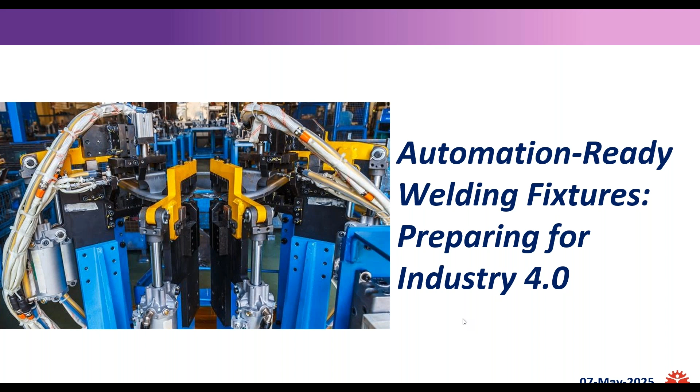Today, I've been given the opportunity to provide an introduction about APA Engineering and also about our expert Mohan, who is eagerly waiting to present his webinar on automation-ready welding fixtures. In brief about APA Engineering, it was started by two brothers with a couple of employees, has come a long way and been in business for 25 successful years now.

As we celebrated our silver jubilee this year, APA has become a 500 employee strong organization. We have been providing 4 different service lines, namely sourcing, engineering, compliance, and cataloging, and each service line complements each other through our certifications like ISO 9001 for quality and ISO 27001 for data security. Beyond that, we also got the TISAX certification to work with the top automotive companies from Germany, which is again a stringent data security certification.

We're also very proud to let you know that APA has also been declared as one of the happiest places to work by House of Cheer. Now, I'll just talk about the engineering division alone because that's where our presentation is going to be taking place. Our engineering division is classified into 5 different categories, namely product engineering, manufacturing engineering, plant engineering, digital modeling, and embedded engineering. So I'll go one by one through what we do in these 5 divisions.

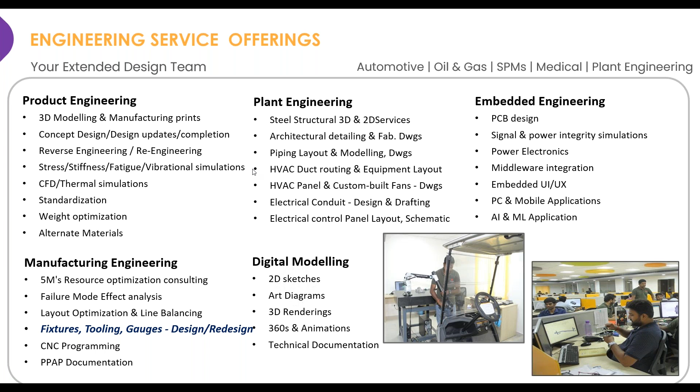And the next one is digital modeling. With rendering and 360s, we provide the perfect solutions to our clients who look for digital part catalogs and sell online. Last but not the least, in embedded engineering, we have good knowledge in PCB design, signal and power integrity simulations, and power electronics. So, to sum it all up, we work as an extended engineering support team for our clients in USA, Canada, Germany, and Australia. We add value to our clients through our consistent dedicated services. So this is a short description about our company APA and the engineering division.

Now I need to speak about our speaker, the hero of the day, Mohan, who completed his mechanical engineering graduation in the year 2006. He has 18 plus years of experience in various mechanical design projects and is an expert in providing industrial automation and fixture design solutions to our clients. To add feathers to his cap, he got certifications as well: Certified SolidWorks Professional and Project Management Professional. At present, he is heading the Automation Design Division as Project Manager.

There are so many projects he has worked on, but we have just named a few, like the assembly line workstation designs, end of arm tool design, and layout optimization design. So with this, I leave it to Mohan, who is going to present the webinar.

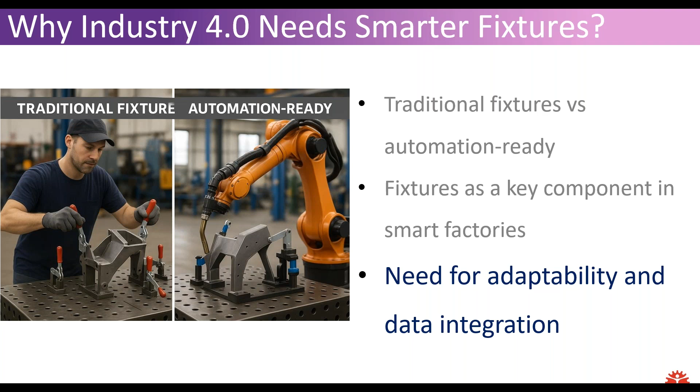In smart factories, everything is connected: machines, robots, and systems all work together. Fixtures are a big part of this. A smart fixture does not just hold the part, it also sends useful information, helps things be more accurate, and saves time. These days, factories make different parts and things change quickly. That is why fixtures need to be flexible. And when fixtures can share data, we can track how things are working and make better decisions to improve the process.

So now let us look into some of the core features of automation ready fixtures. One of the most important features is high repeatability. That means the fixture holds the part in the same exact position every time. This helps in getting consistent welds and better quality. And locating accuracy makes sure the part is placed in the right spot, which is very important for robots and automation.

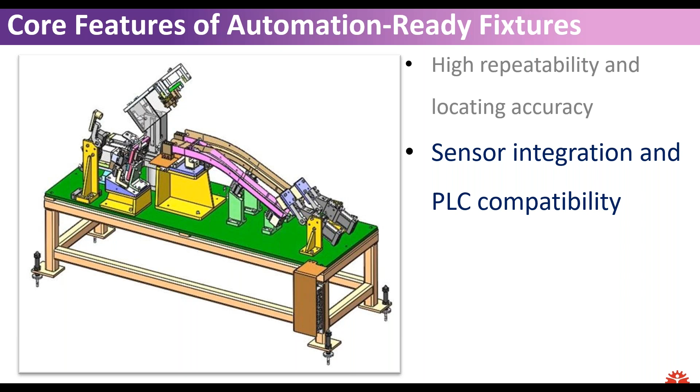Automation ready fixtures have sensors to check if a part is placed correctly or if a clamp is working properly. These sensors can send signals to the PLC or the main controller, so the system knows everything is ready before welding starts. And these fixtures come with quick clamping systems that save time and reduce manual efforts. Some even have auto alignment, so the fixture adjusts itself slightly to make sure the part is in the right position.

If you note this welding fixture case study, this can accommodate both left hand and right hand components of the front radius arm. You can find the component here, front radius arm here. But based on the client's requirement, only one product, either LH or RH, will be welded at a time in this fixture. So, to minimize the number of components in the assembly, a quick changeover mechanism is incorporated in this section. By pulling the knob and rotating the unit 180 degrees, this fixture can be quickly reconfigured to hold the RH component. So this is one of the examples of the quick changeover mechanism.

Let us see some of the design considerations for automation. The first important consideration is accessibility for robots. When designing for automation, we have to make sure robots can easily reach the welding areas. If the fixture is too tight or crowded, it becomes hard for the robot. So we keep the design open and accessible.

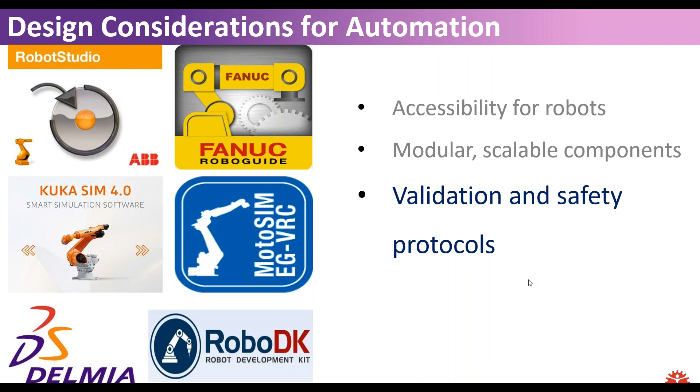The next design consideration is validation and safety protocols. Before we run the fixture in production, we must check everything through validation, making sure it works correctly and fits with the automation setup. Safety protocols are also important to protect both machines and people during the operation. Some of the software are capable of performing the validation, like verifying human robot safety zones and accessibility, and virtual commissioning of the fixture with the robots and conveyors. So we can make use of these software to validate safety protocols.

Smart fixtures have built-in sensors to check things like pressure, alignment of the part, and how long each cycle takes. This helps us make sure the process is running smoothly and gives us useful data without manual checks. These smart fixtures also store the data they collect. This data helps us predict if something might go wrong, like a clamp getting weak or a sensor failing, so we can fix it before it causes downtime.

With all this data, we can run simple analysis to see where time is being lost or where quality issues are happening. So this helps us improve the process and make better decisions for future jobs.

We do automation ready welding fixture design and provide 3D models and 2D manufacturing drawings. We also do the robot simulation to check the welding arm reachability. So this is one of the welding fixture case studies to weld the brake caliper components.

A quick summary of this webinar. We have seen the necessity of smart fixtures for Industry 4.0, and some of the core features of the automation-ready fixtures like high repeatability, sensor integration, and quick clamping. And what design considerations have to be taken care of for automation, like accessibility for robots, and why the design should be modular and scalable. And also we have seen how we can collect the data and what we can do with the collected data.

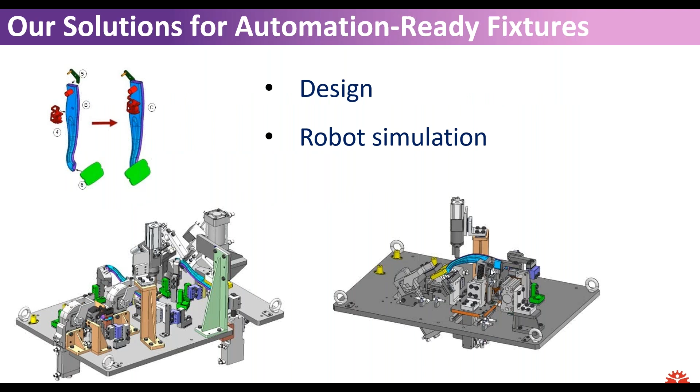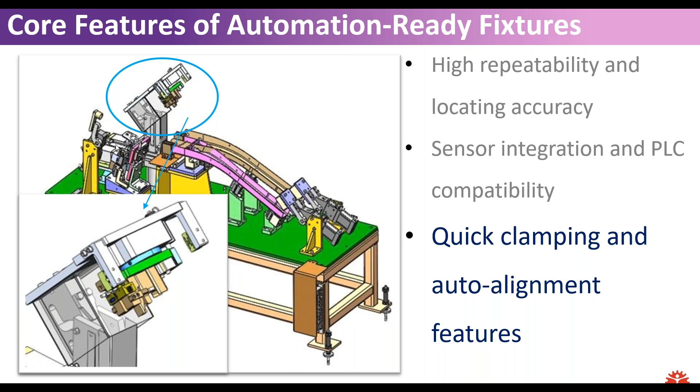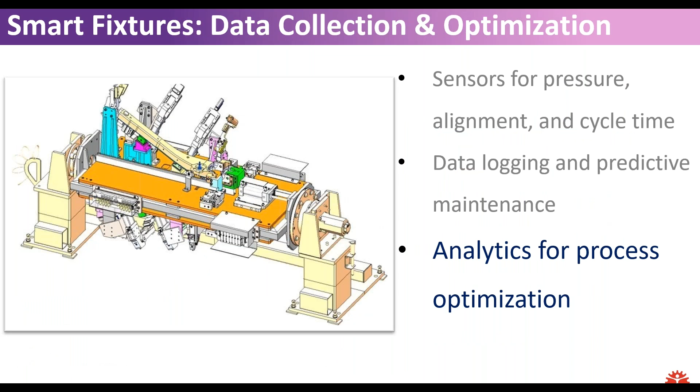In fact, we have used pneumatic cylinders in one of our designs which are resistant to weld spatter. You can see one pneumatic cylinder here. This is resistant to weld spatter itself. And you can find two more pneumatic cylinders here. These cylinders are also resistant to welding spatter. The brand name of this cylinder is Welker, W-E-L-K-E-R. You can Google it to know more about it.